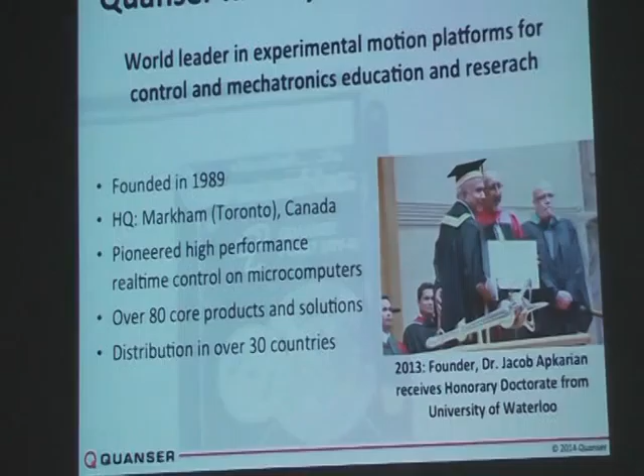So with that as an introduction, let me introduce the company a little bit. Quanser is based in Canada, and we are a high technology company in the Toronto area. We're approximately 25 years old this year. We were founded by a gentleman named Jacob Apkarian. He is a very renowned control systems authority at a global level.

He was the first to design a commercially viable version of the Furuta pendulum, the inverted pendulum. He also was the first to pioneer real-time, true high-performance real-time control on the MathWorks platform that you'll hear a lot more about with the next talk after mine.

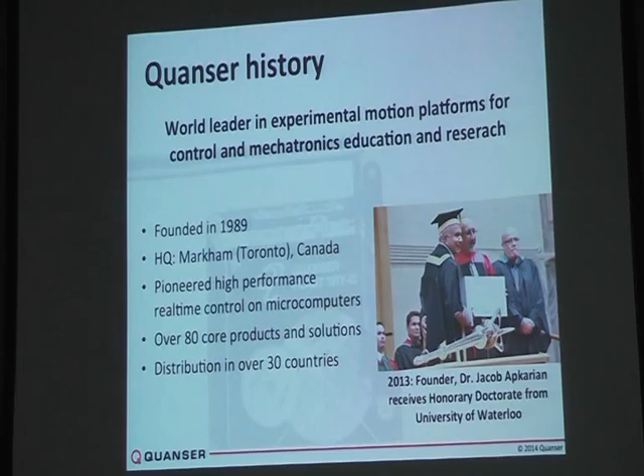So in recognition of that and many other things, he was awarded an honorary doctorate from my own home university, University of Waterloo, which is considered in Canada to be the number one engineering university.

Today we have offices in many places and partnerships in many places, including India, through our partners EduTech.

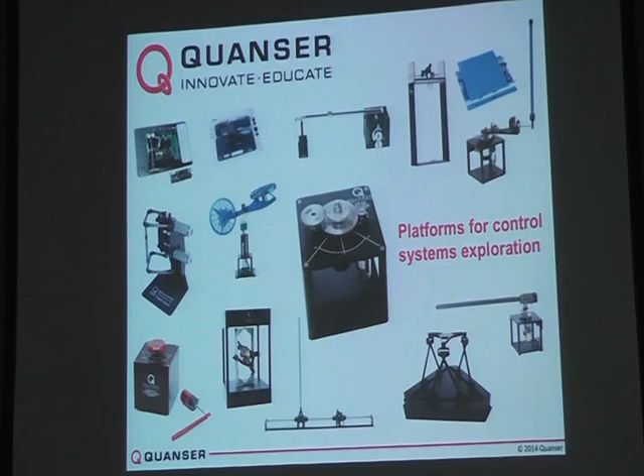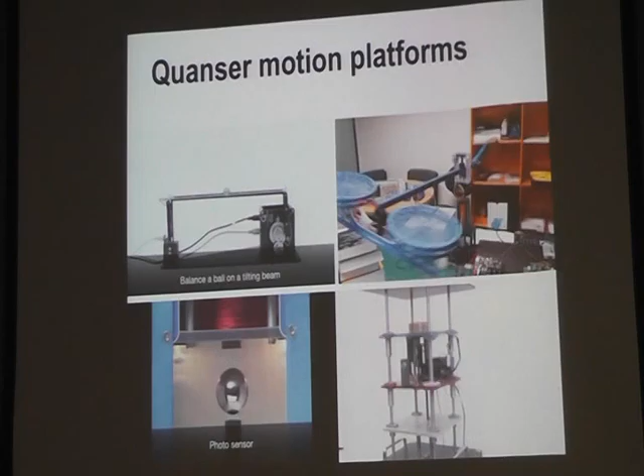What we do at the company, we're most famous for this. We make toys for old people like me. We make wonderful things that move and shake and provide you with an amazing way to validate the control systems work that you're doing. Many of you, as I saw in the sessions yesterday, are developing new algorithms for control. At some point, you have to validate it with experimental results. Many consider our systems to be the gold standard. So we support a wide range of different dynamics. Depending on what type of controller you're developing or what application domain you're interested in, chances are high that there's something within our catalog that will support you.

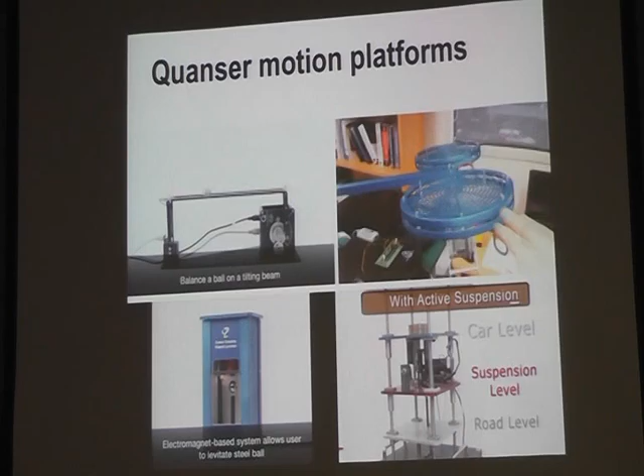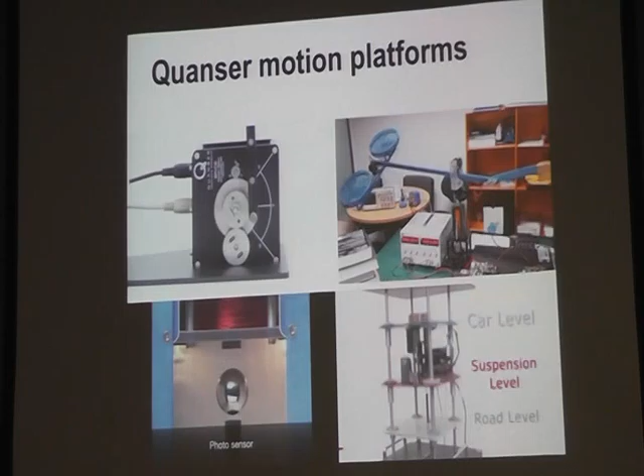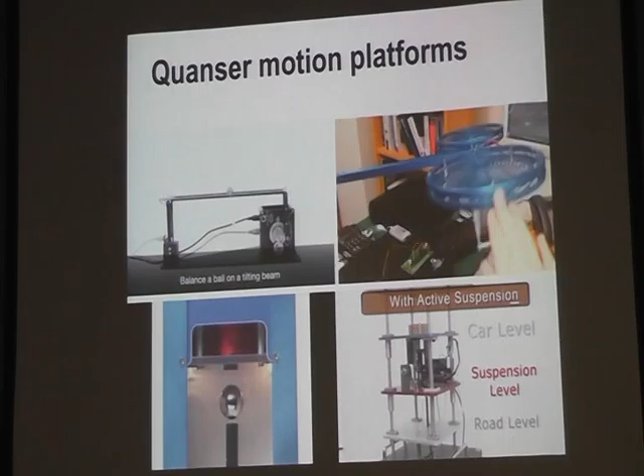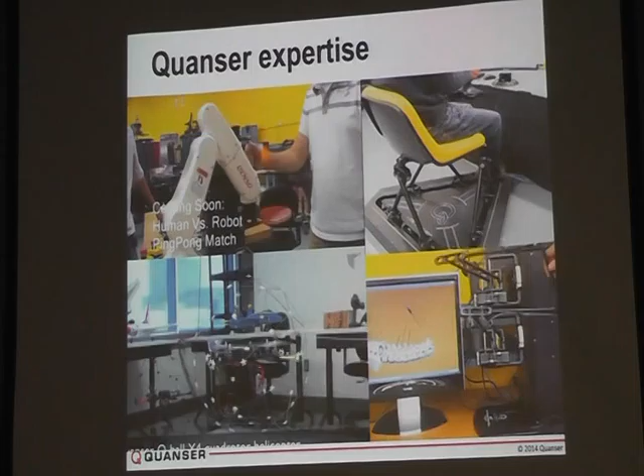In case you've never seen one of our devices, this is the kind of thing we do. Here's four examples. One is a very traditional servo motor connected to a little rail that has a steel ball, and it balances. We have things that look like helicopters so you can study flight control without actually having to find a real helicopter somewhere, which sometimes isn't easy to do. Magnetic levitation. The last one is an active suspension, which is a double spring mass damper system. Many of you are familiar with that from your studies. These are wonderful platforms that isolate the essential dynamics you need for your work.

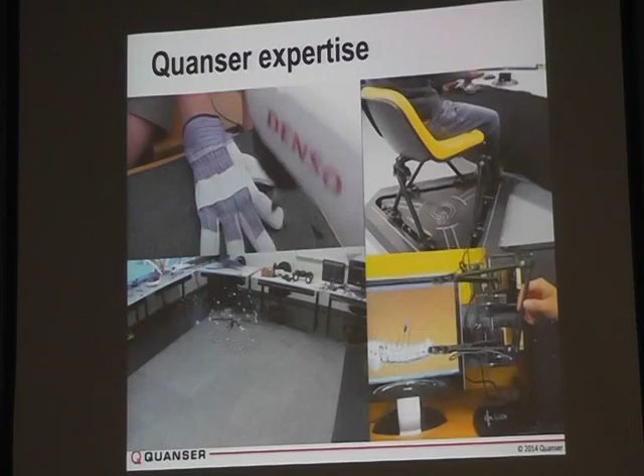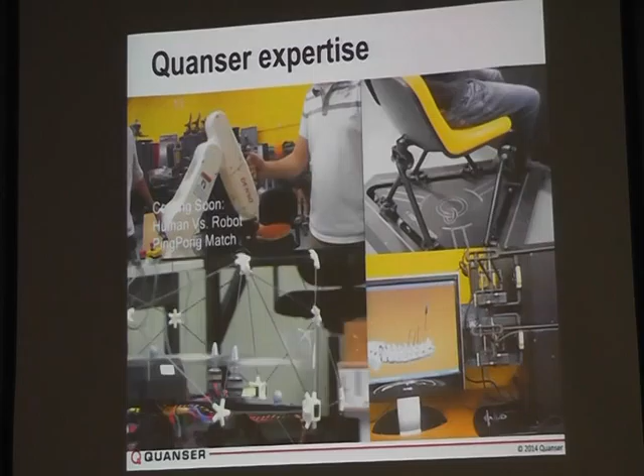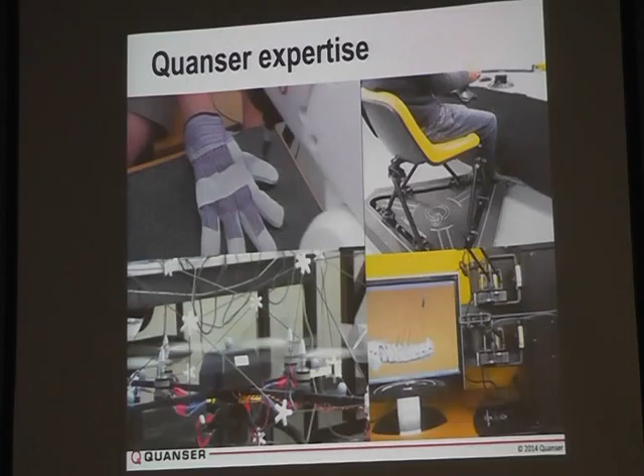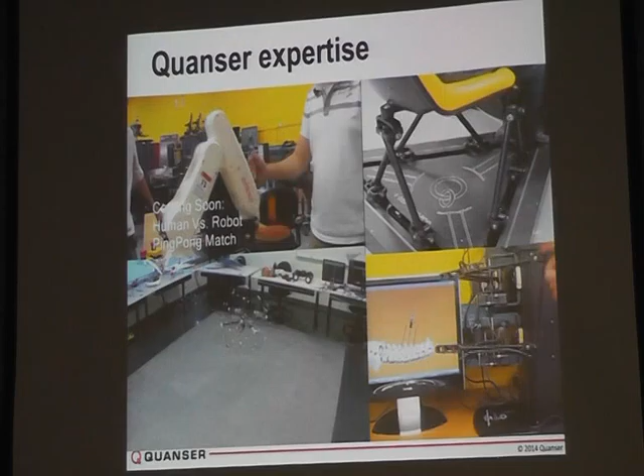In addition to these platforms for research and teaching, we also have a fairly strong record in more advanced applications, typically with a strong research focus. Here's some examples, a lot of it's in robotics. We're actually quite good at telerobotics and haptics, which means using special devices that provide force feedback. We can control the motion of robotic manipulators that also send force information back to your hand. We also have mobile robotics of various sorts, among many other things. A lot of these have been used in research applications in places like aerospace. We do a lot of work with the Canadian Space Agency, biomedical applications, and a fair bit of work with defense, among many other things.

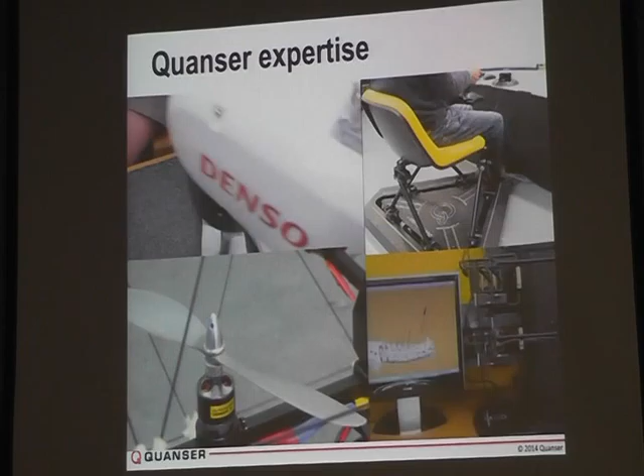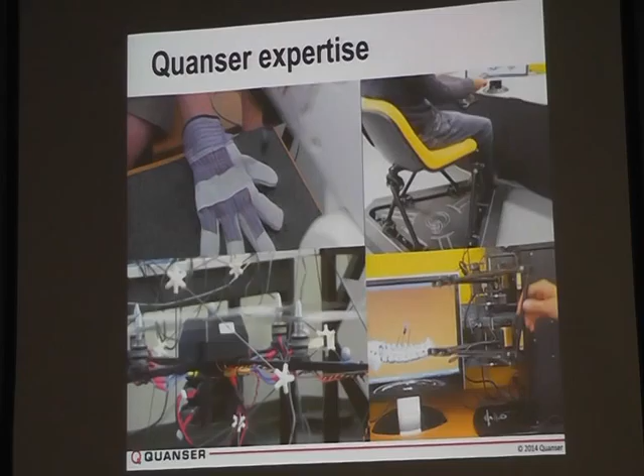So that's the research side. Like Dr. Bishop yesterday, most of my talk will be on education, so it will not be too taxing for you. Just sit back, relax, think about your own experiences as an undergraduate student. If you're a faculty member, think about the suffering you've done trying to do the best work for your students. I want to offer you some food for thought, some things to allow you to imagine a bit more about where we can go from where we are today in a global sense to a new world. I call it the new face of control systems education because of faces like these.

But today, at least in my country, for under $1,000, many families are able to afford that. They can get a 3D printer. Why? Because it's fun. Robots, the little Lego robots, are powerful computational platforms, and in our country, they're about $100. Certainly a lot of families can afford that.

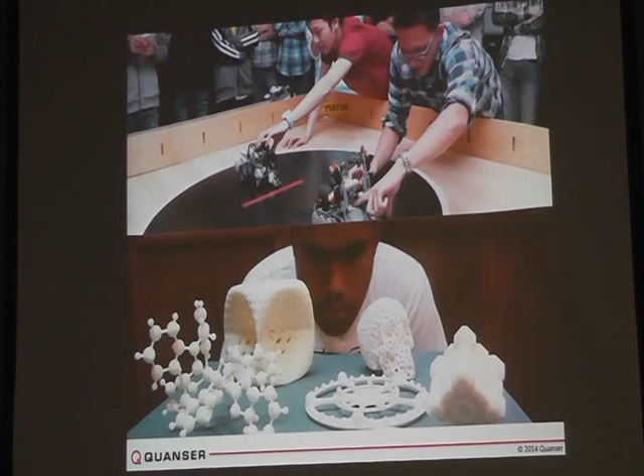We've impacted a relatively small proportion of the total number of courses. Most courses given in most universities in the world are still largely traditional, where people like me stand up in front of a large room and talk for an hour, and you listen and go home and do mathematics.

I am in no way suggesting that all of a sudden we should take a differential equations course and make it fun for everybody and just play in it. No, those concepts are important. But there are things we may be able to refine, to modernize, to make more relevant, and in the end, more useful and more rigorous.

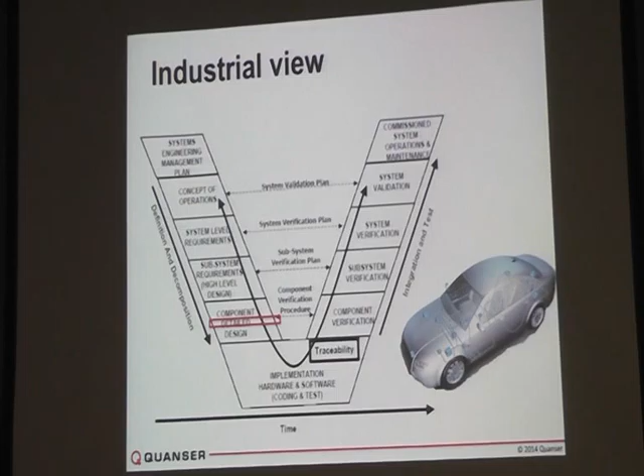But ultimately, the definition of control systems is changing in the modern world. A lot of my work has to do with how we can reflect that without disturbing what we're currently doing, without throwing away the good things we've historically done. A highly theoretical and rigorous approach, the fundamentals and theoretical foundations, are absolutely important. The reason we focus on them at a university is because we're not training technicians, we're educating the future technological leaders of tomorrow.

In some sense, my work has been about making that transformation easier for institutions. Because not doing it...

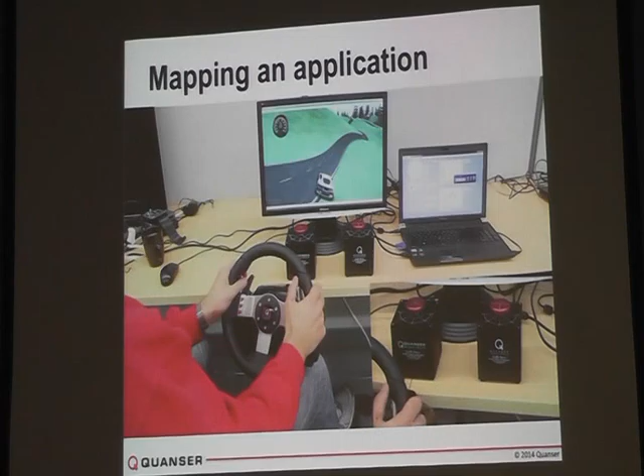It's kind of hard to see initially, but there are two DC servo motors. The one on the left has a disc spinning pretty quickly, and the one on the right has a disc going back and forth. As you saw, a finger touching it can add disturbances. Those are classic control systems—the one on the left represents velocity control, the one on the right position control. Not too different, until you notice there's a steering wheel attached to it and a pedal, and on the screen is like a driving video game.

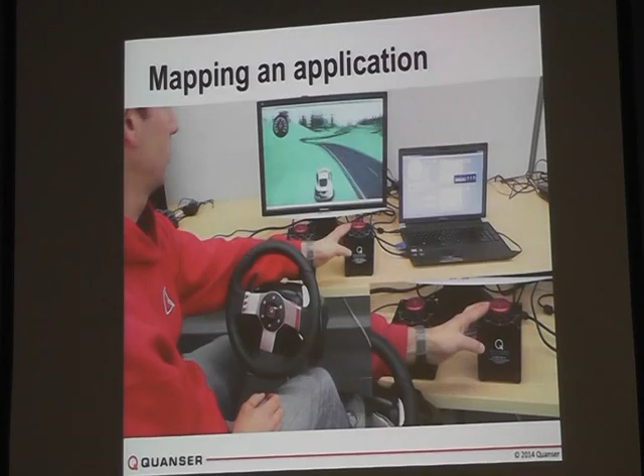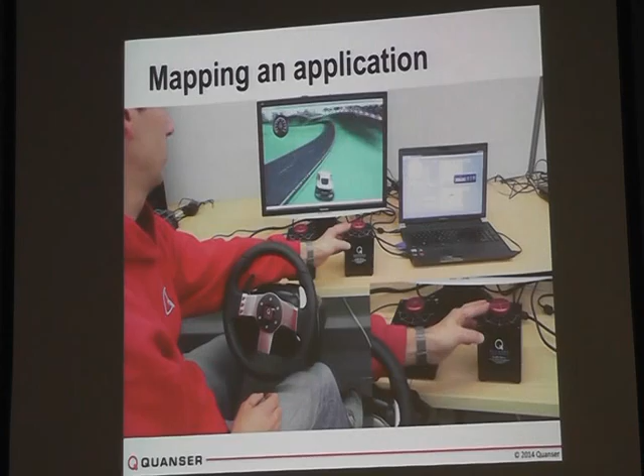The models to that video game are attached to those motors. They are in a true hardware-in-the-loop simulation. Why is that important? Aside from the obvious that maybe a student might like driving this game-like thing, the fact that it is in a proper hardware-in-the-loop simulation means that there is an ability for you to discuss why you might want to test with real hardware for a control application in automotive.

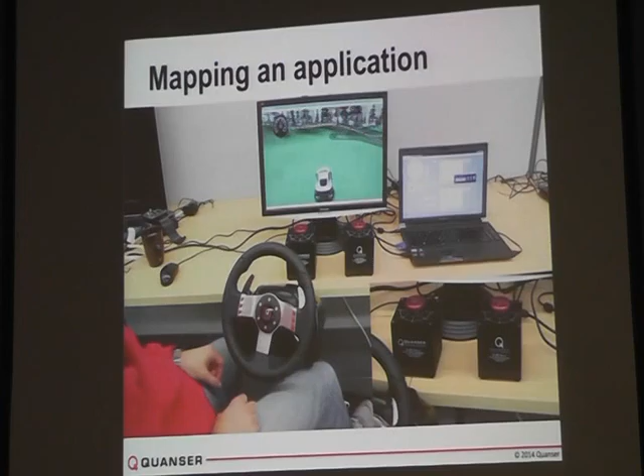In fact, this actually is conceptually not a game. If you go into a real automotive company, as my friend Antonin knows full well, this is what they do. They have large rooms with big computer screens of car animations and steering wheels and big, huge motors and things. And they try to map visualizations of the final application onto their controller.

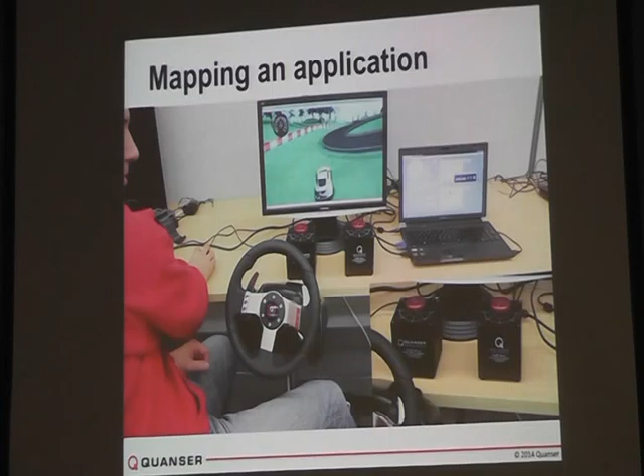It is out of the question that if you are a new engineer for Tata and you work for 7 weeks to come up with a new controller, they're not going to let you put it inside a real car and have it drive around a test track. They're going to put it on a simulator like this, but not a pure software simulator. They're going to put it on something that has a little bit of hardware to it so they can see how it will kind of work in the real world.

So what we've done was we've taken traditional position and velocity control, not too different from what you would actually do 10 years ago, but made it more interesting and fun. Interesting in the sense that it's industrially relevant, fun in the sense that it's a video game.

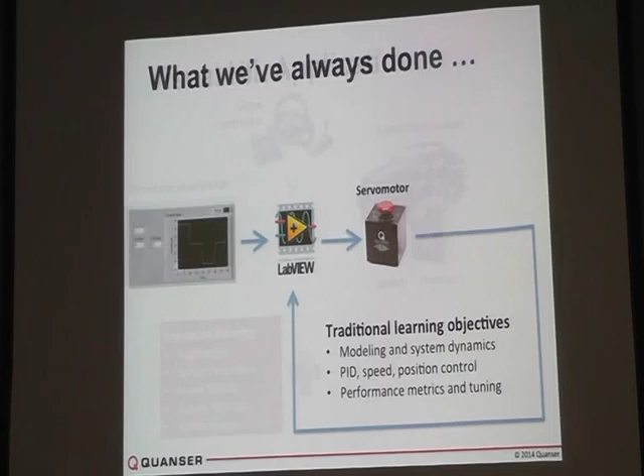So at a more abstract level, this is what it means. In that case, the software was LabVIEW. This is what you would have done 5 years ago. If you had purchased one of our machines and you wanted to do a hands-on lab, this is what you would have done. You would have hooked it up to a piece of software, LabVIEW or Simulink. You would give it abstract signals, steps and ramps and things like that, and you would look at the response.

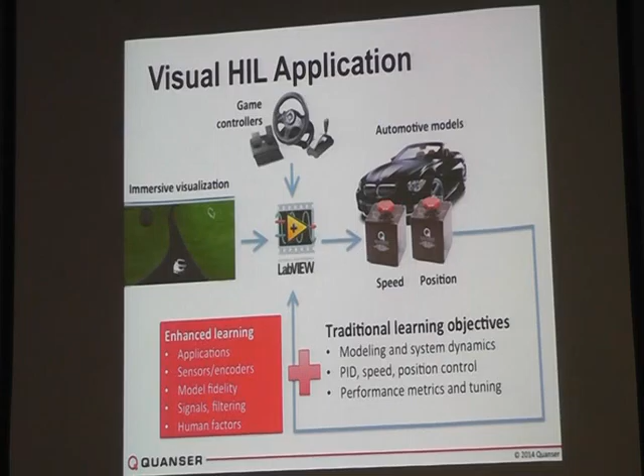And then you would change or add disturbances and see how the reaction is. You would try to tune it. You would explore different types of controllers and all of that. Many of you have done that, no big deal. All we've done with this example, with the automotive, is we added a second motor because we want to show speed, that's the wheel dynamics, as well as the position.

But in addition to the traditional learning objectives, we added a lot of insight into applications, sensors and encoders, model fidelity, and the importance of modeling, which is a very, very important topic, signals, filtering, even human factors. There's a lot of potential here for you to really look at system-level issues.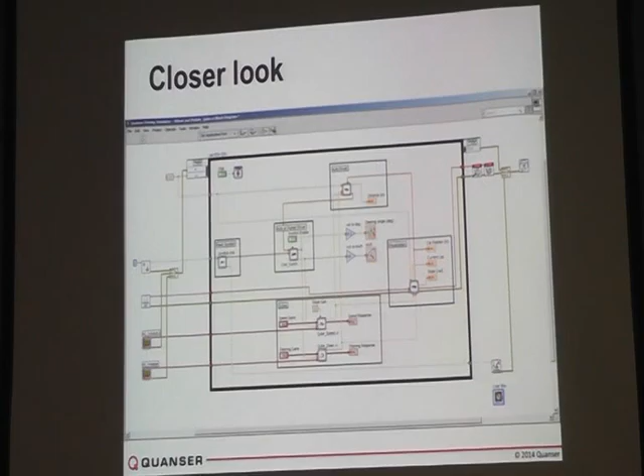If you look closer at the software side, again, this is LabVIEW. There is an entire equivalent within the Simulink world. The systems, because of the nature of these graphical design, graphics-oriented, block diagram-oriented design systems, you can easily carve out or separate the subsystems and really talk to the students and have them understand that the control systems belong as part of a larger application, and all of them are important. One of the things that makes a great control system versus just a theoretically sound but perhaps not a very useful one is its ability to exist in such a large system.

So this is a quick example of one of the projects. Right now, it's so early, there's only been a few universities that have tried to deploy this, but ultimately the hypothesis that we are testing with this application are things like real-world applications. Can we actually throw in the concept of automotive engineering inside a control systems course and not confuse the heck out of everybody? I think if you actually put in real automotive concepts in there, you will confuse everybody because they take into consideration so many more factors.

So what we are saying is, let's take out the essential concepts, put those on top of traditional control systems concepts, and will that help people? I don't know. We'll find out over the years, next few years.

Are video games good for students? That's a pretty important question. I think if I just ask the faculty members here that question without showing this, are video games good for students? Many of them would say no. No, we should make sure they don't play video games. But in some sense, I think because of the natural instincts of young people, and in this case, because this is what industry does, it may be a good thing. Something for you to think about. So let's move on to the next one.

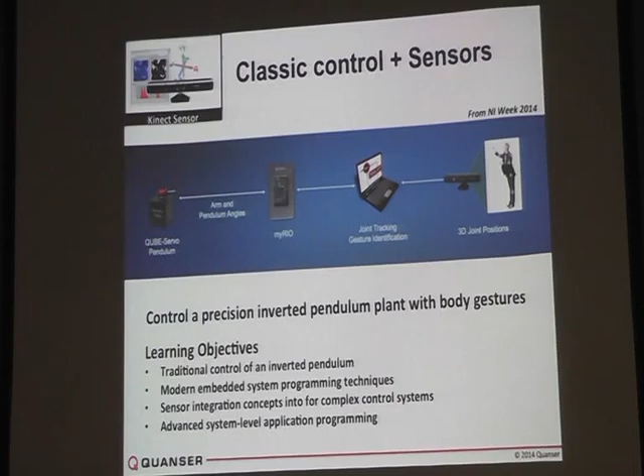So we started looking at things like this. This is an example we did with National Instruments. We took one of these servo motors, in this case with an inverted pendulum attachment, and on the other side we attached it to a Kinect motion sensor, which you may be familiar with from the Xbox system. They're really good sensors. We have a traditional computer for development, and we have this thing called a myRIO, which is an embedded platform.

It's a bit of a higher-end one, and it's something National Instruments offered to give you a view of embedded systems that's very consistent with a lot of teaching activities at a university. In any case, we wondered, can we actually get students to start attaching sensors and things to servo motors within a controls course, and will that be a good thing?

To test that, we hired an intern. This is William. He was in grade 11 at the time. Now he's an exceptional grade 11 student, but a grade 11 student nonetheless. We said, here are the basic concepts of control. We didn't go into too much detail, but said take this motor, this basic idea, and see if you can hook up a sensor to it so it understands something and does something with the motor. We used the word 'something' a lot because we wanted him to think about it and come up with the application. So I'm going to show you what he ended up doing.

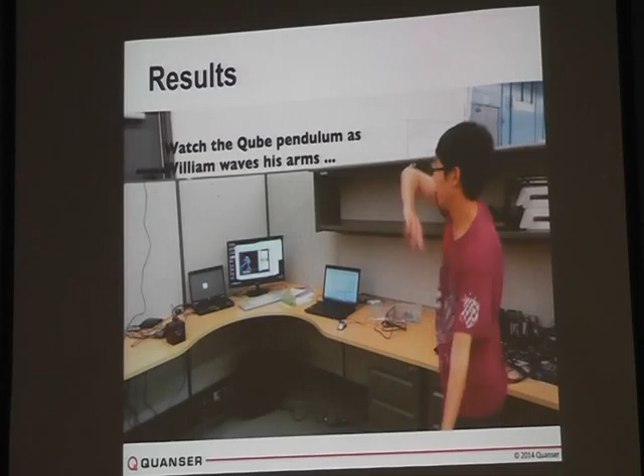This is sort of the connection of it. Here you see the servo motor. The software is LabVIEW, and there's a little picture of a human being, and here's the Kinect sensor. That's going to sense the motion of the arm swinging by William, and that's going to define the input signal to the inverted pendulum. Let's see how that actually works.

He's swinging his arms, and as you can see, the pendulum is swinging back and forth. It's actually doing a proper swing-up, and then it balances the rod. He's moving back and forth right now, and you can see the input signal to that pendulum.

Is this practical? No. Do people do this at Tata? No, they don't do this. Do people at Tata attach sensors to a physical system? Absolutely they do. Your modern luxury car has sensors everywhere now—everywhere. So the technique of sensing something from the physical domain, doing something with it, and using that in a feedback loop to do something else, that is absolutely an industrial process. For William, it was just fun, and he spent about two weeks doing this. We were absolutely astounded by what he was able to achieve for such a young person.

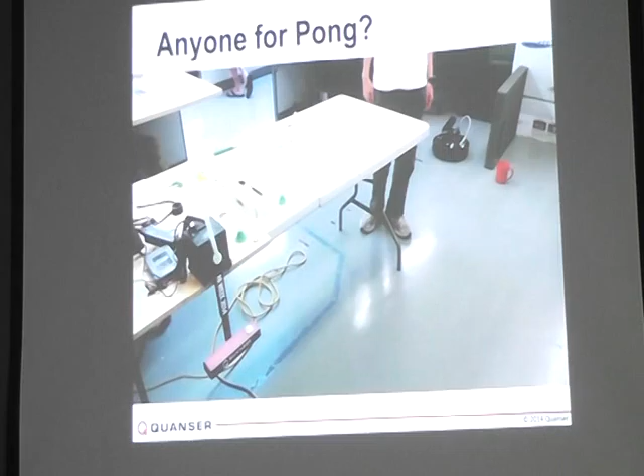Is that a good thing? I think it is. I think you can understand the fundamentals of PID control better by adding more stuff to it and making it more challenging. But the challenging aspect of it is a good challenge. It's a rigorous challenge, intellectually stimulating, and most students will respond well. And we are really moving away from a very narrow view of control to something that is more comprehensive.

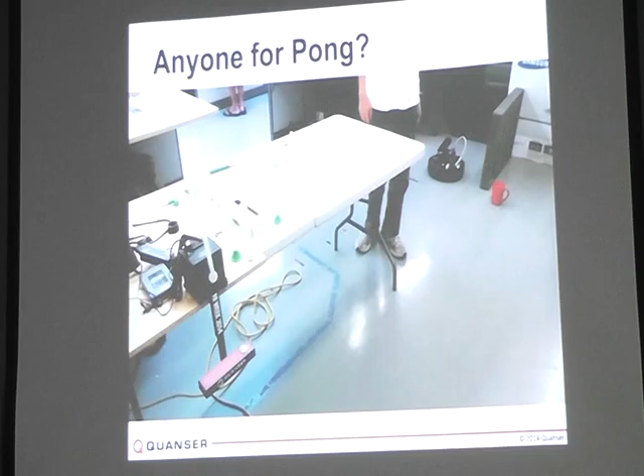Here's another one. This is fun. That's all it does. So you see the servo motor? It has this weird arm, and it can shoot a ping pong ball and land it in a cup. So I don't know if some of you have done things like this before.

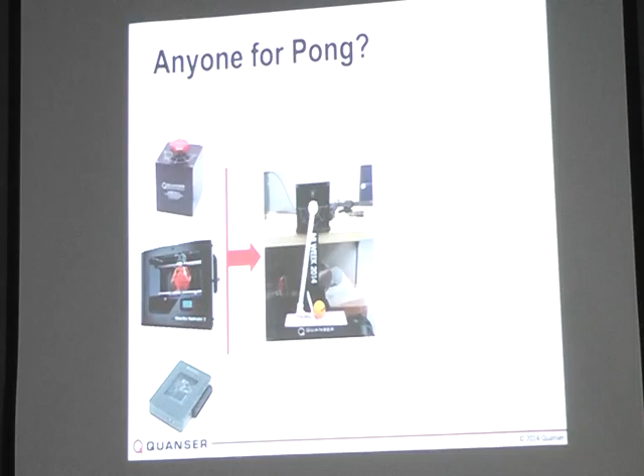When I was in high school in grade 11, we had a physics project where we had to use some kinematic calculations to shoot a ball and hit a target. That's not hard to do. Creating a machine where you can just set the distance and say, give me 1.78 meters and have it hit it, that's much harder. That's what this machine does. It does a few other things.

So in fact, initially we had a very simplistic view of this, which is 3D printers are now the hottest thing in the academic market. Let's do something with it. That was it, as innocent as that. We wanted to play with 3D printers.

But in the end, because we were Quanser, and part of our approach is always, we don't want things just to do stuff. We want to make sure that the precision and the power of mathematics and modeling and the conventional rigorous approaches to engineering are highlighted. So we wanted to identify an application where precision matters.

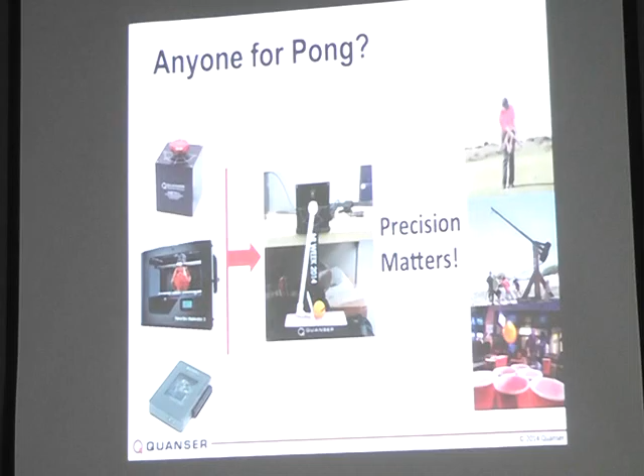So in creative thinking, we were thinking about golf swings or catapults and projectiles, but there's actually a popular game in social situations in North America called Pong, beverage Pong, where you basically throw a ping pong ball and try to get it into a cup, and students spend hours doing this. We thought, let's make the world's greatest Pong player. That's kind of where this came from.

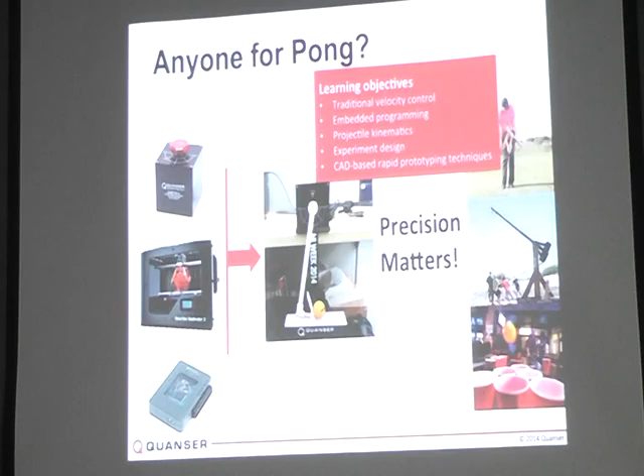But the more serious aspect of this, what you just saw, is once again, you had traditional velocity control, but we also added elements of embedded programming, projectile kinematics, experiment design, and CAD-based rapid prototyping techniques. Once again, we took the kind of work you're doing in control, and the way I like to express it, we place it inside a proper engineering workflow. A workflow is another word for process, but it's closer to the kind of words that industry uses. It just means a recognition of the fact that your work has to go somewhere, and it has to go somewhere good. We were able to introduce students to a good place that control systems can go into, and in this case, rapid prototyping, embedded programming, and ultimately projectile applications.

This is part of actually a sequence of student projects, and this is the latest version of this. This was what came out of the University of New Mexico this year.

The Rube Goldberg machine is a formal concept where you devise an incredibly sophisticated machine that does nothing. And in fact, it's even better than that. If it does something, for example, pick up a cup, it has to do it in the most mechanically complex way possible. What it is, is a test of somebody's ingenuity in connecting mechanisms.

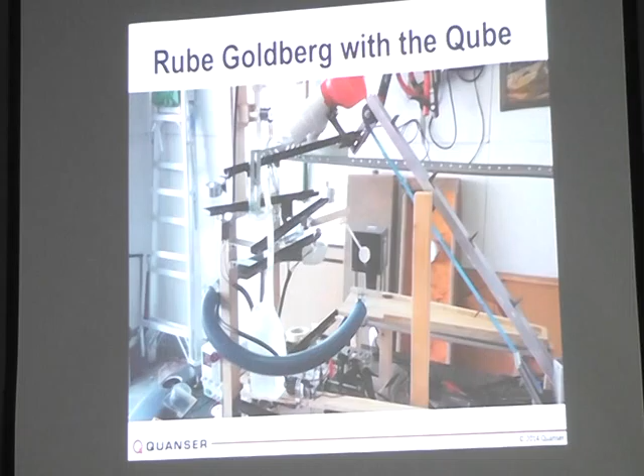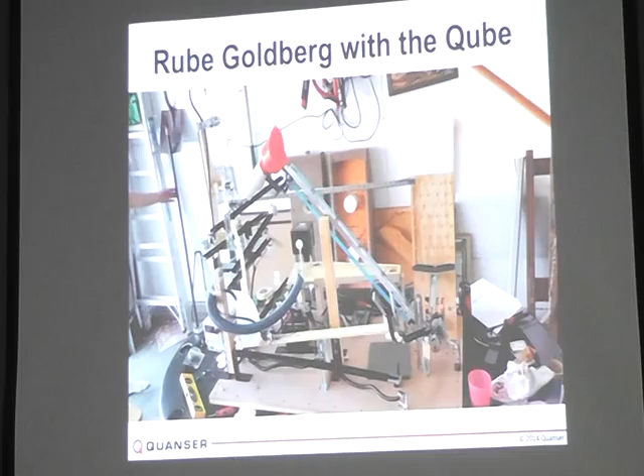So we gave a challenge to the students saying, we are going to give you 2 servo motors, one up here and one down here. You have to design and fabricate something with a 3D printer and then create a machine that sends a ball in all sorts of wonderful ways, understanding all of the physics and mathematical modeling required and robust manufacturing and all of this good stuff. You have to create it in a self-contained demonstration version, meaning there has to be an ability for it to do its task and reset. What you just saw is the reset mechanism of the ball being thrown up.

So this was a 4-month project. These students have never seen our servo motors, and they were able to do the fundamental research they needed to control the motors. And then it was pure mechanical, electromechanical creativity and experimental design after that.

So, that's kind of fun. What are the serious points behind this? It's not entirely serious, actually.

3D printers are so cool. You do anything with it, and it's going to interest students. Everybody is now intoxicated by 3D printers, they are so amazing. If you don't do anything with it as educators, at best you will miss an opportunity to do something interesting; at worst, you will be out of sync with today's technology. Especially in engineering, the techniques of rapid prototyping embodied by 3D printing are a very important emerging technique, and your students will be at a deficit. I'm not saying control systems is the only place to teach it, but to reflect that kind of reality in multiple places within the curriculum is an important topic for you to consider.

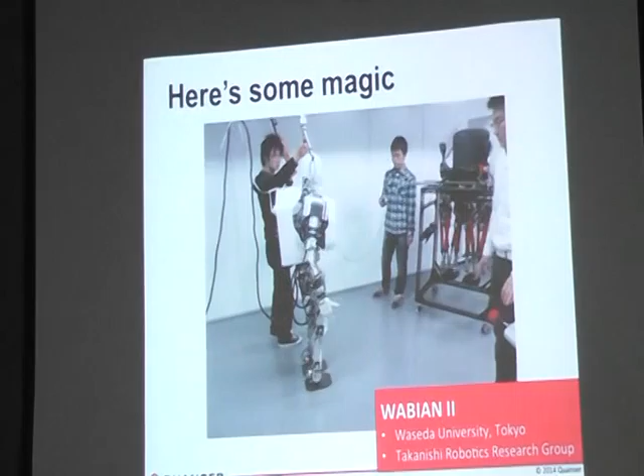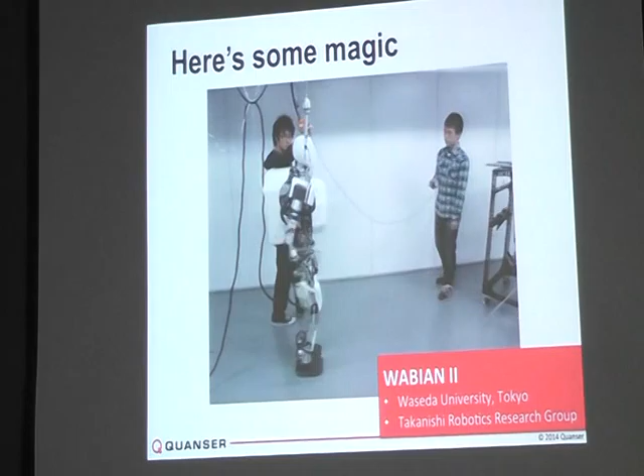I certainly went in because of that. For me, I loved telescopes and outer space. It was not so much wanting to go into space - because I'm a coward, I don't want to go into space - but I like looking at space, and I like the machines that look into space. When I was a kid, we didn't have computers. I built a telescope and stayed up all night looking at stuff I didn't understand. But I loved the machinery and the optics of the telescope - it was magical to me. There were other things like that too, and I'm sure many of you can tell me the same story. So a lot of us go into engineering because we fall in love.

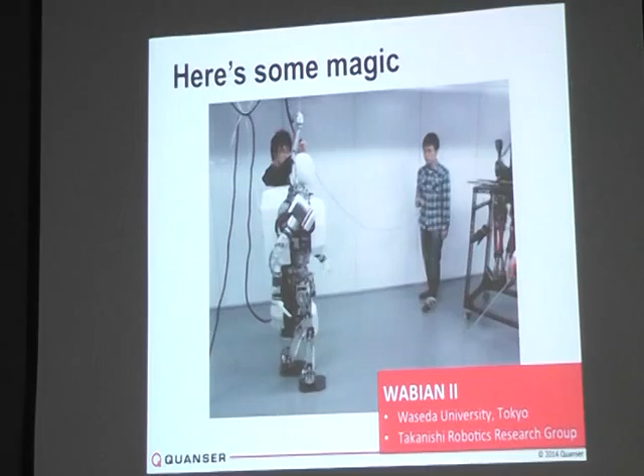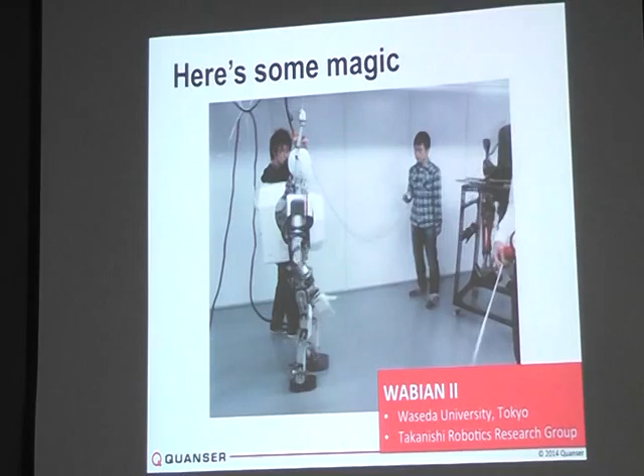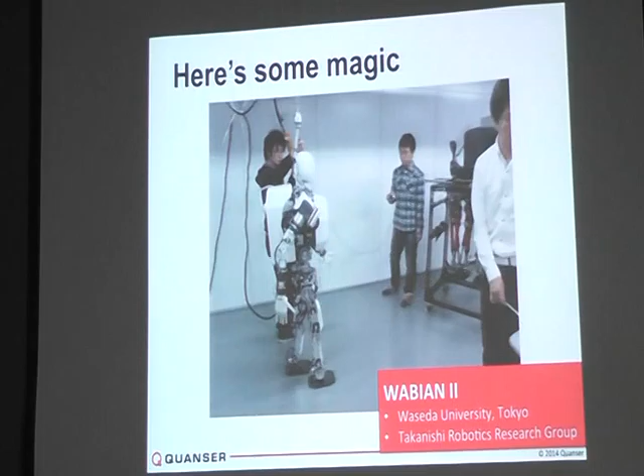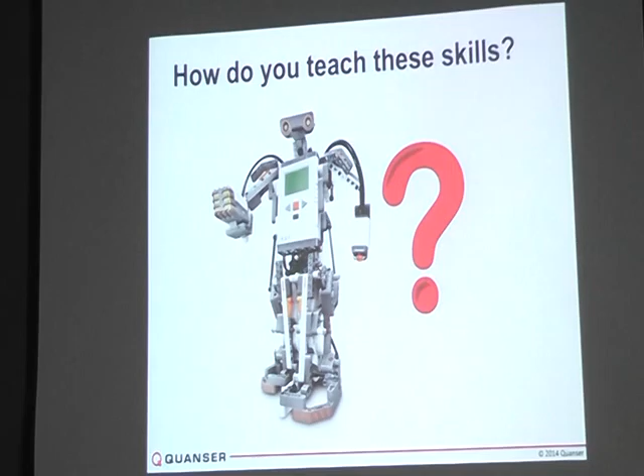I want to show you a little video of a love affair I had with a robot once. This is Wabian, from about 15 years ago. I was in Japan visiting one of the premier engineering universities, Waseda University. This gentleman, Professor Takanishi, is one of the foremost experts in humanoid robotics in the world, and this was his lab's creation, Wabian. You've seen Asimo from Honda - the little white robot that does stuff - this is Asimo's cousin. If you look at Asimo, he sort of walks as if his hips are fused together. If you look at the way Wabian walks, he has this thing going, almost like a dance. They added additional degrees of freedom and the control for it - that's the kind of stuff you're doing, but it's inside this magical thing. And I thought, no, it's absolutely possible to connect what you do to magic.

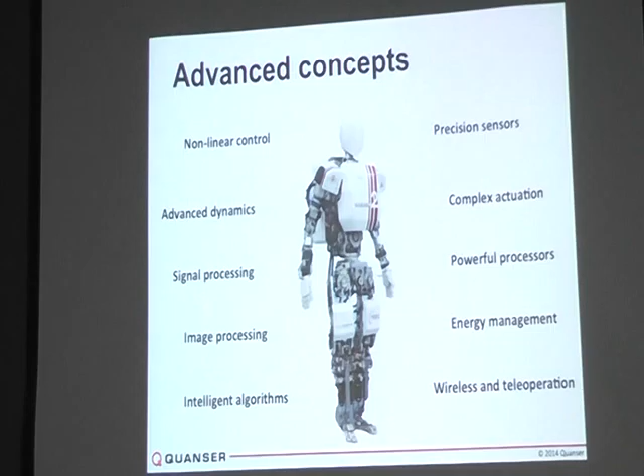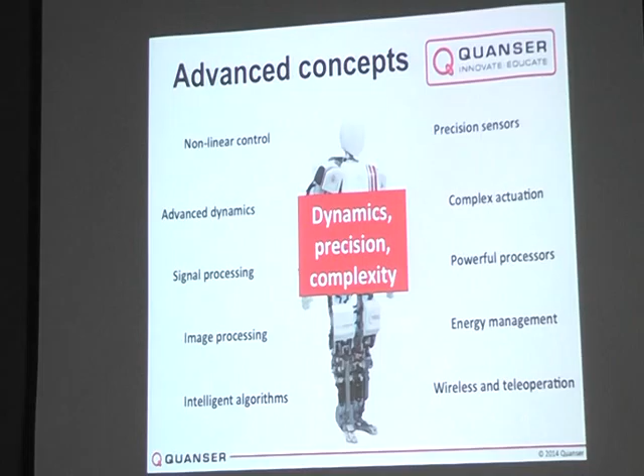But if you think about what universities are doing today to deal with this magic, many of them are using these hobby platforms. There's nothing wrong with that - these are actually very powerful, capable systems. But they have a particular view of robotics that I'd like to challenge as not being optimal. If you want to prepare yourself, or if you're a faculty member preparing your students to ultimately work at the Takanishi lab, among many others doing such exciting projects, there's a whole bunch of things you have to have a better understanding of. You don't have to be an expert in everything, but you have to be aware of everything and expert enough in a few things to be part of the team. Ultimately, it's because the dynamics, precision, and complexity actually matter.

And so more recently, at a company level, that's what we've been focusing on. In this emerging world of robotics, which is really hot right now, what is our role as Quanser, and our philosophy? So we have to look a little at what robotics means in the formal sense, as far as the academic world is concerned. We tend to divide it into two worlds these days: one is the traditional world of manipulator robotics arms, filled with things like Denavit-Hartenberg matrices to develop equations for the kinematics, and similar really intense mathematical techniques.

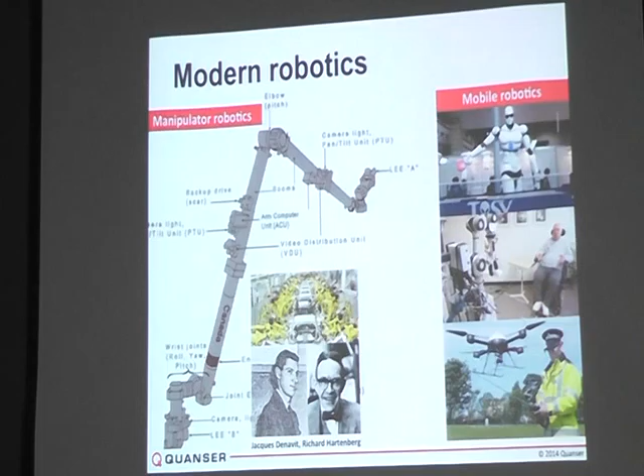And then we have the more recent infatuation with mobile robotics, whether they're ground vehicles, aerial vehicles, or humanoid robots that look more like what you'd see in the movies. That's probably why people are getting excited about it. But at an academic level, both views of robotics have found a foothold, and people are doing good work. What we wanted to explore was how to do that really well, because there's a third branch of robotics emerging: hobby robotics. In fact, the next talk will discuss that more. At least in North America, we have a weird situation happening.

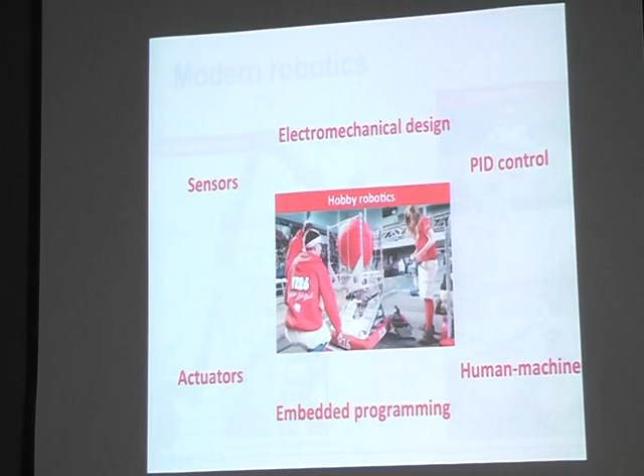In my biography there was a mention of something called First Robotics. That's a national or international competition with approximately 5,000 high school student teams, ages anywhere from grade 10 up to grade 12. They develop complex, autonomous, mobile robots, and the level of sophistication is very high. They apply these types of activities, and they come into university understanding PID control, embedded programming, actuation, and control. They know all that stuff.

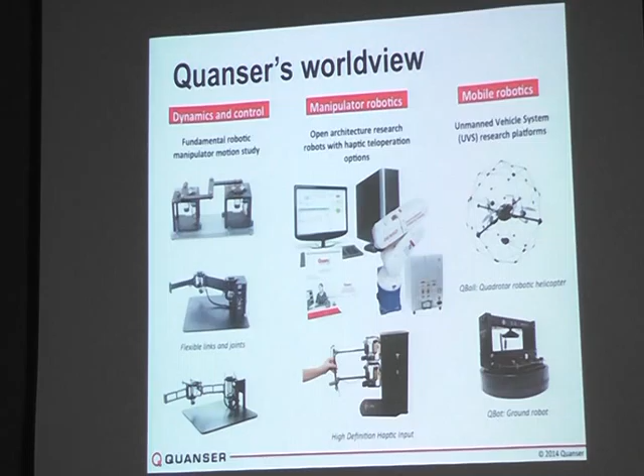This is more of a commercial pitch I'm going to make: the work we're doing at Quanser is trying to figure out how to divide our product line into three categories. We have mobile robots—I'll show you a video of one soon—some that fly, some that roll around on the ground. We also have traditional arms with haptic interfaces as options, to really look at the kinematics and dynamics of manipulators and the control of their motion. For those who want robotics applications but really want to focus on control—say you're doing flexible manipulators or something requiring more sophisticated control algorithms—we isolate certain types of dynamics for pure robotics-oriented control applications.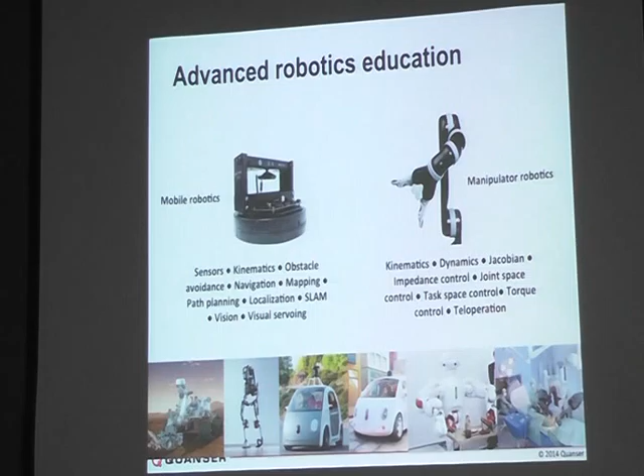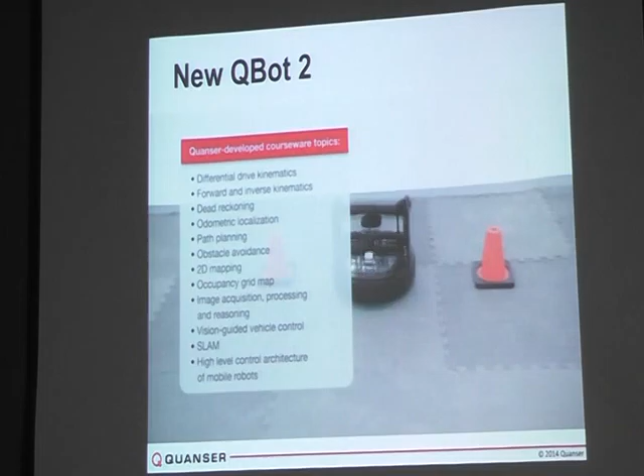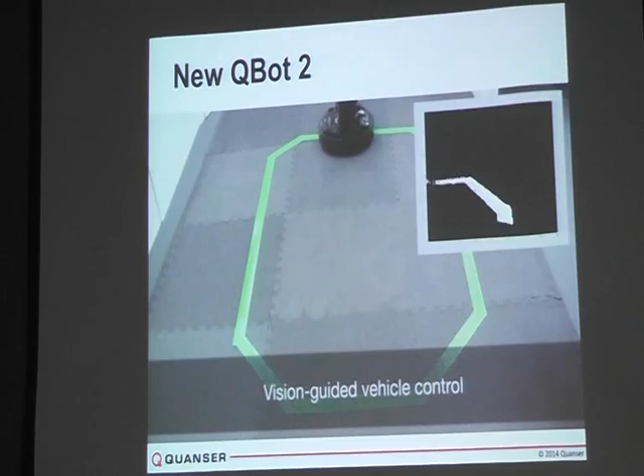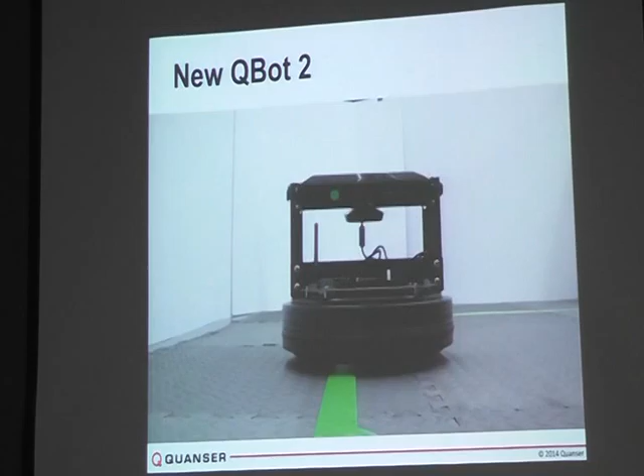So those are our products, but more importantly we're now commercializing versions well suited for undergraduate education. This is a very significant point. Right now robotics education at the undergraduate level is dominated by things like Lego or Arduino or hobby robotics platforms, because that's how we as academics have responded to the hobby trend. But ultimately, through work like yours, all of us want students to be able to do what I'd call real robotics—these higher-end applications, the pictures you see in front of you. That requires study and mastery of a whole range of topics. Hobby robotics simply don't have the dynamic fidelity to let you do that.

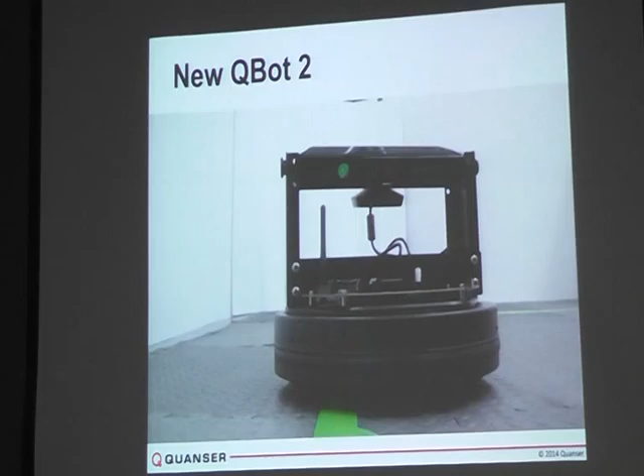So we're introducing a whole range of new robots. This is one example, called a QBot 2. These are the kinds of things we allow you to do, and if you look at the actual robotic applications, this is the real thing. If you can figure out how to do this with software—right now for this one the software is MATLAB and Simulink—that's an amazing platform for you to really look at the concepts of robotics without going into deep, dark C programming, which would overwhelm any course, and allow you to really study modern robotics. So we're trying to figure out how to get a proper, sophisticated, high-end robot at an affordable price that you can actually deploy to an undergraduate class.

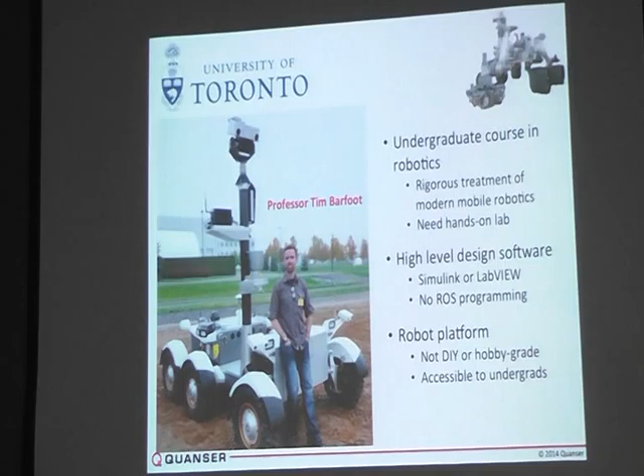Our partner in the academic world is the University of Toronto. This is Dr. Tim Barfoot, and ultimately he wanted to be able to do real robotics at an undergraduate level using Simulink in his case, with no programming in ROS. ROS is the Robot Operating System—that's what final practitioners of robotics use these days for real applications, but it's so intense and dirty it will never be applicable for an undergraduate course, in his opinion. So he wanted to find an alternative, and he chose Simulink for that. Ultimately, he also believed he didn't have time to just try to build it himself. I saw an example at the University of Bangalore where they were doing that, and it's taken them years to refine it to a certain extent.

Depending on your budget, getting a proper commercial platform is quite often the cheapest way for you to do this. And that's the direction we were heading.

Ultimately, it was really about fun plus rigor. Does that equal magic? If you had access at the undergraduate level to a real robot like R2-D2 that can sense obstacles, go around them, pick up stuff, would that rekindle your love affair with engineering that got you there in the first place? That's the hypothesis.

So in the end, again, these are works in progress. Maybe I'll come back in a couple of years and report to you how we're doing. Discussion points: is this a good bridge between hobby robotics that students are now coming into university with, and real-world robotics? How far can we push this?

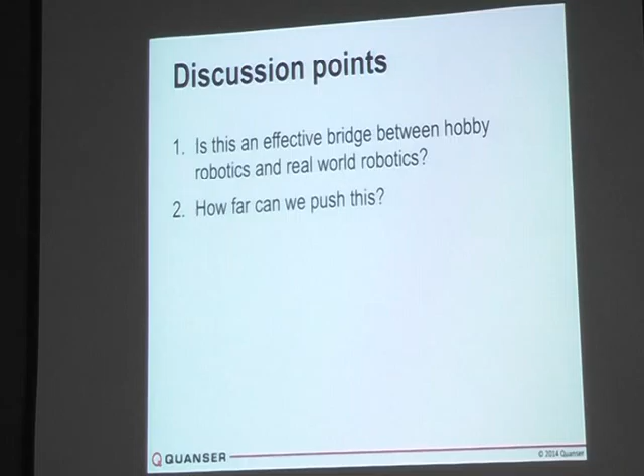So you've heard of the Internet of Things. This view of robotics is reflective of the fact that robots are platforms, not final applications these days. Just as the microcomputer of the 1980s provided a platform for engineering creativity where magic happened, then the World Wide Web and its view of applications, then mobile platforms—this is the next one. Things that actually move around physically but are smart computationally. We don't know what they're going to deliver to the world in a few years, but they will. This is another form of introducing that in a rigorous engineering fashion.

This is a bit of a confession. I was part of the instruction team for this course, and it was not until I took my job at Quanser that I fully understood what that course was about. Really, that's why I'm doing this talk today.

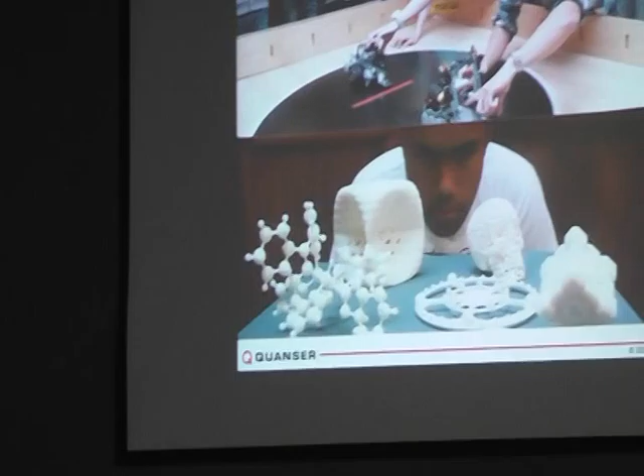So as somebody who was on his way to a PhD at the number one ranked technical university in Canada, I did not know how to properly deploy a control system, because even the lab was so abstract. All I knew how to do was, okay, I know it's this equation, I programmed this little bit, and I push these buttons, and this happens. That's what I knew. It took another 20, 25 years for me to understand why that was important.

What I was hoping to do today was give you a sense of why your work is so important, and have you think beyond that final conclusion that I've been seeing in the sessions. They're really important because you've worked hard on those algorithms, but in the end, think about where those algorithms go. Ultimately, they go here—to real people, real excitement, real magic.

So really, we're talking about going from an old face like Sir Isaac—everybody knows him, everybody loves him—but we want to really make him cool again. So yes, your work is important. I've really enjoyed being here, I've enjoyed meeting everybody, young and not so young. And I still have another day, so I look forward to another exciting day here at the conference. Thank you.

Any questions? Any questions? If I talked about LQR, would there have been questions?